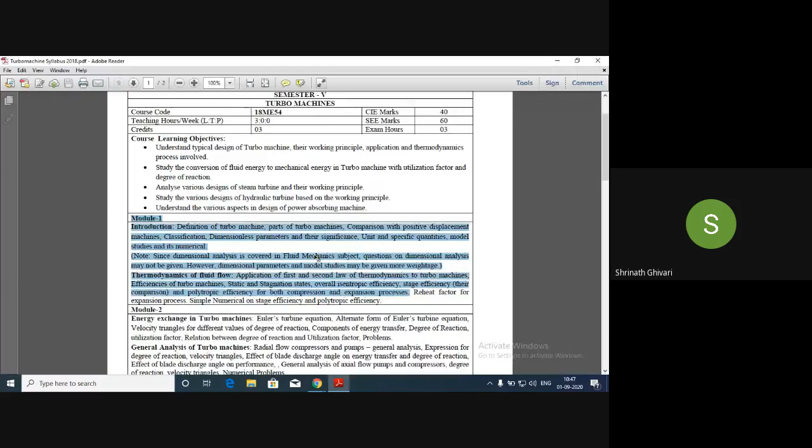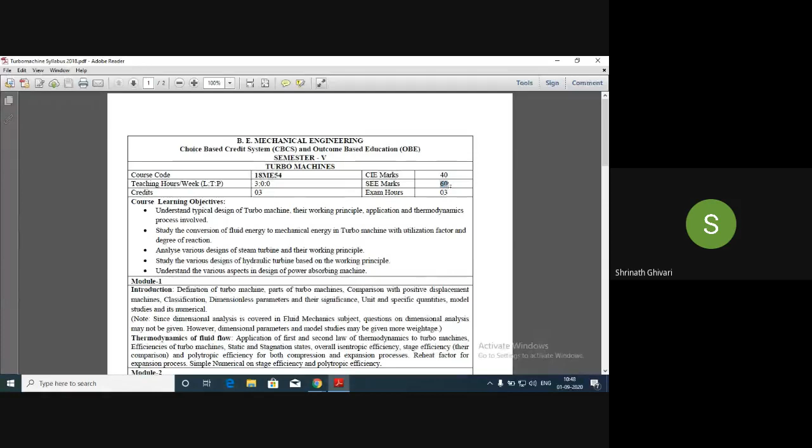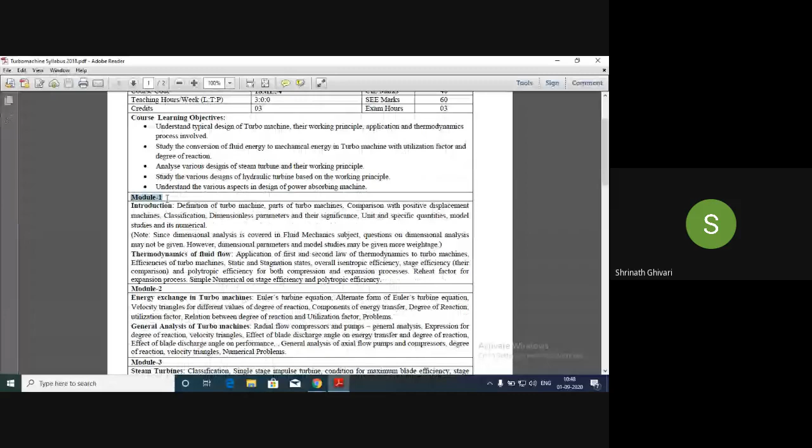The subject name is turbo machine, and the subject code is 18ME54. And internal marks, we have 40 marks. You have to write 3 internals. Semester end examination marks is 60, and examination will be 3 hours. These are the course learning objectives. Please go through them. Then we'll be initially starting with module 1. For today's class, I will just brief about the syllabus, what we have in module 1 to 5.

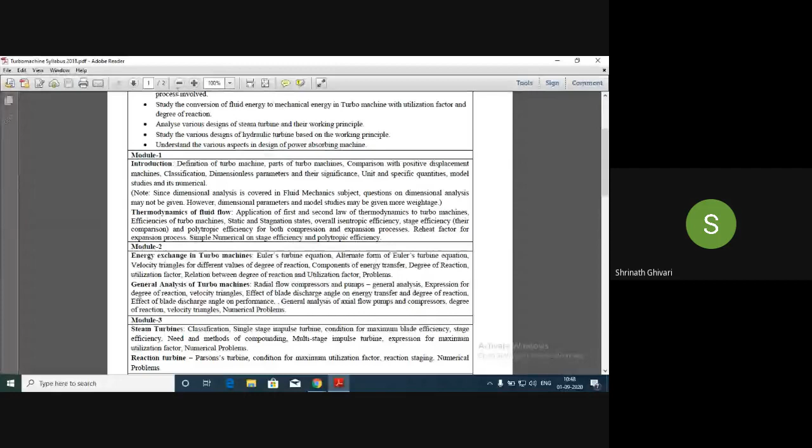So in module 1, I was telling that we will be learning and understanding the turbo machine, its definition and its parts, general parts of a turbo machine. Then we have positive displacement machine. We will just understand what is a positive displacement machine, and we will differentiate between a positive displacement machine and a turbo machine.

Okay, so then we will be studying...

Then we will be studying about some dimensionless parameters like Reynolds number, and we'll understand the significance of Reynolds number. Then we will be studying some important quantities like unit and specific quantities, which are helpful in predicting the performance of a machine, especially a turbo machine.

Then we will be studying about model and model studies. Model studies is, I think you have learned it in the previous semester, which is model and prototype, similitude study, where we'll be going through the kinematic, geometric, and dynamic similarities.

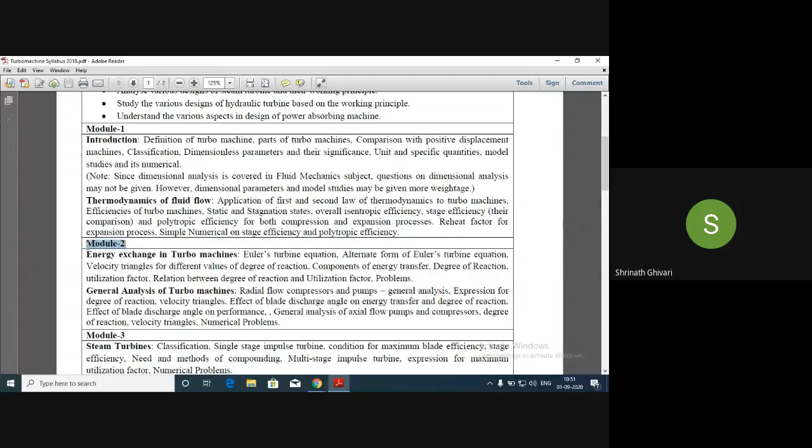Then in module 2, this is very important. Module 2 is about velocity triangles, which is a slightly difficult part, but at the same time, if you understand it, it is very easy. So in module 2, initially we will understand the three-dimensional application of velocity triangle to a turbo machine, how the velocity triangle can be drawn, and what is the use of the velocity triangles. All these things we'll understand in this unit.

With the help of velocity triangles, we can find out work done and many other performance parameters of a turbo machine. So this is another method other than the conventional method. In applied thermodynamics, I think you have found out efficiency of an engine, efficiency of a gas turbine, and work done. So here also we can find out efficiency and work done with the help of the turbo machine or this velocity triangle concept. So we'll understand how to find out the work done, efficiency, and other performance parameters of a turbo machine.

First, in module 2, we'll be learning about energy exchange in turbo machines. Initially, we'll be going with Euler's turbine equation. Then we will be continuing with the alternate form of Euler's turbine equation.

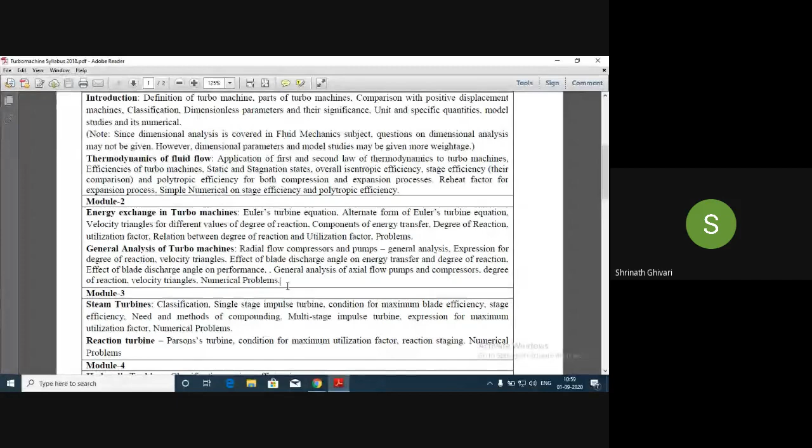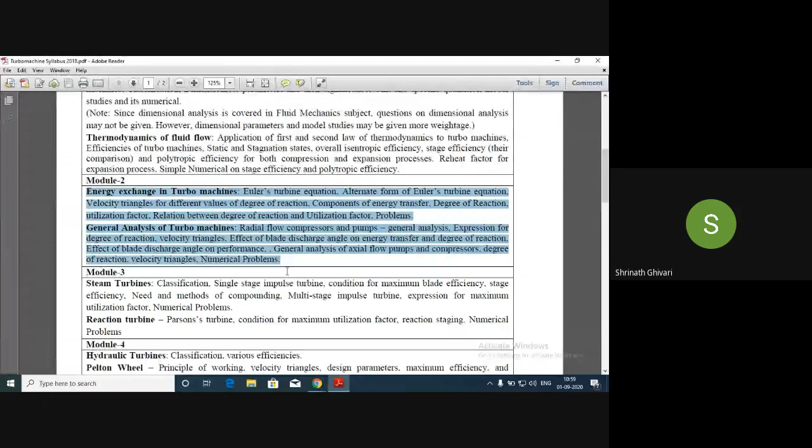Once we understand the general analysis part, then we can use the same concept of the velocity triangle to the actual application part. We can use it to analyze a steam turbine, and we can use it to analyze hydraulic turbine, as well as you already have learned this in your previous semester, that is Pelton wheel, Francis turbine, Kaplan turbine. Then we'll be studying in module 5 centrifugal pumps and centrifugal compressors.

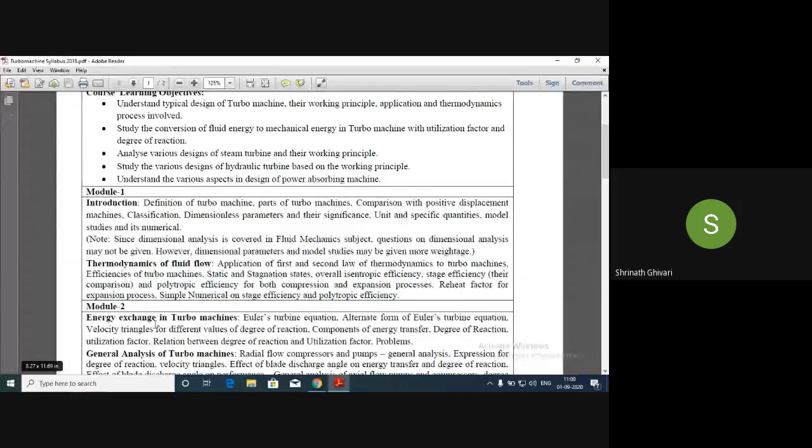Now I was talking about power absorbing turbo machine, power generating turbo machine. Now what is a power generating turbo machine? We should have an idea of that power generating turbo machine.

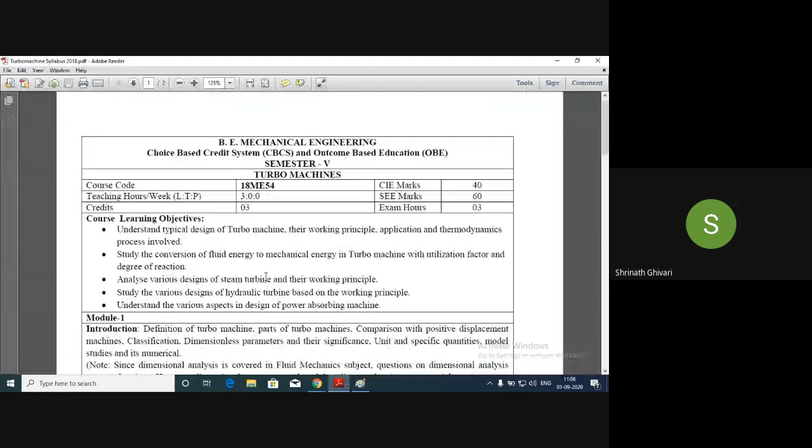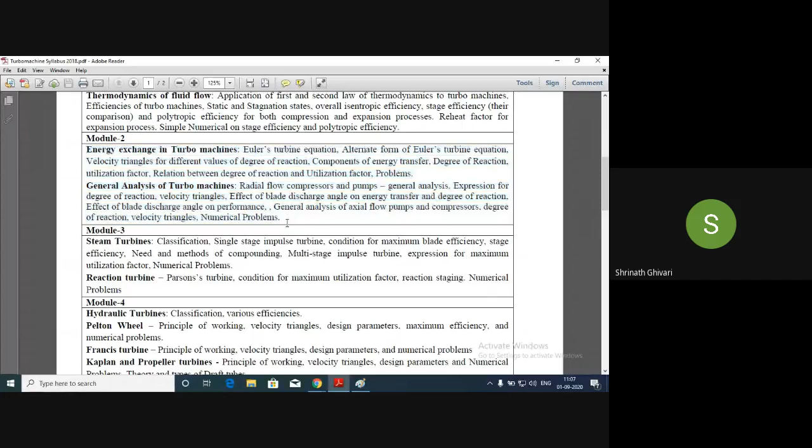If you see the syllabus, in module 2 you will be generally analyzing a turbo machine, and after understanding this general analysis, we will apply it to steam turbine. Now, steam turbine is a power generating turbo machine. In steam turbine we have reaction turbine, so we'll study reaction turbine also. I think about steam turbine, you already studied in EME part that in steam turbine we have impulse turbine.

We have reaction turbine. So we'll be studying some parts of steam turbine, impulse turbine and reaction turbine. And in first year, in your EME syllabus, you have learned about compounding also, correct? So we'll be studying about compounding in this subject.

Need and methods of compounding. I think you have learned about compounding: we have velocity compounding, we have pressure compounding, we have pressure velocity compounding. So all these things. And in steam turbine, we have two types, impulse and reaction turbine.

Again, in impulse and reaction, we have classification that we will see later. Then again, in steam turbine, we will be defining certain parameters, nothing but utilization factor, and we'll be doing a small derivation. You can see here, expression for maximum utilization factor, and we'll be solving certain numericals on this. Also we'll be doing a derivation for condition for maximum blade efficiency, and also stage efficiency.

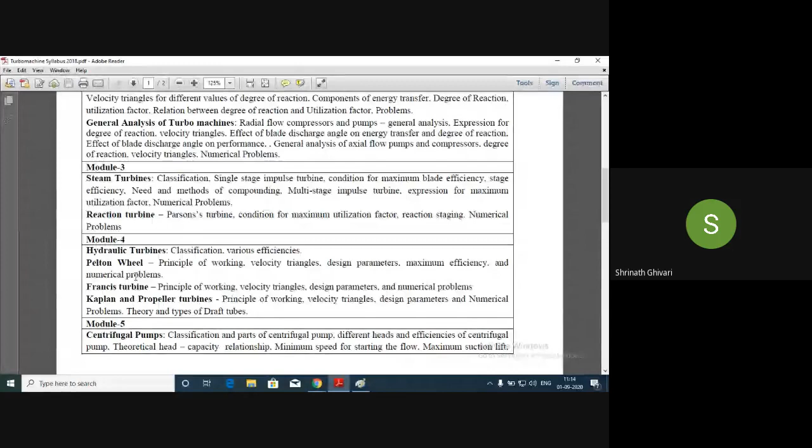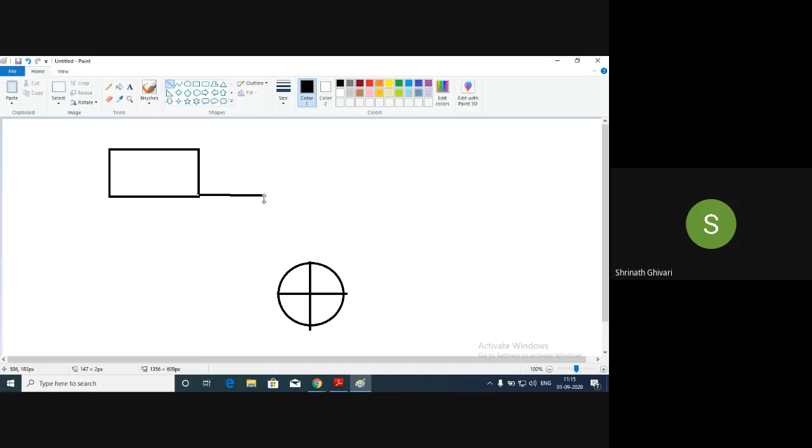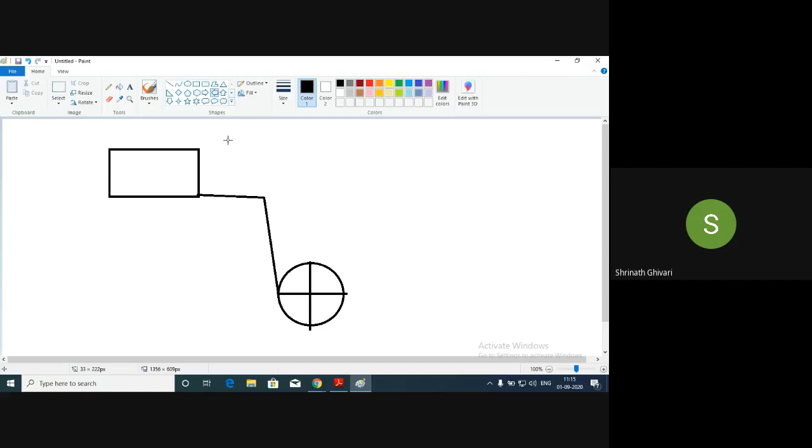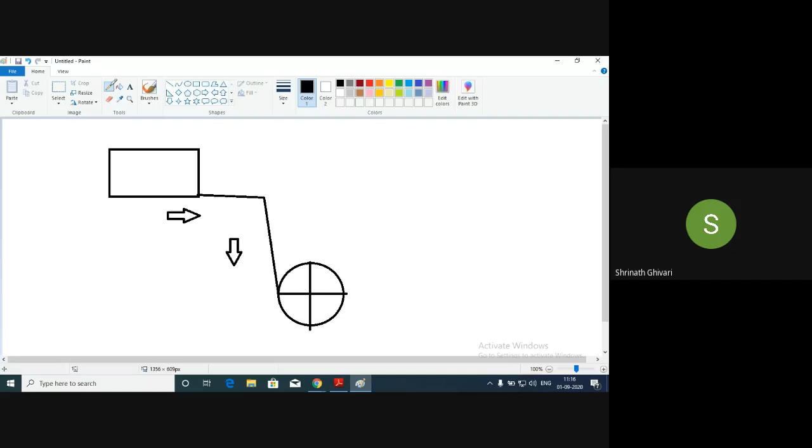Just let me show you on paint so you get a fair idea. Let's assume that this is your turbine, or wheel. So we have a water source here. What we will do is make this water follow this path, correct? If you see this pointer, water will start from here, where we have the water source. It may be naturally available, or it has been created artificially by constructing a dam or some other source. So this is the water source, correct? Water will start from here, come down, strike the wheel blade, and the wheel starts rotating. So this is how the conversion of potential energy generally takes place.

So we have water available at some height, we call it PE, potential energy, correct? Once the water starts moving, we see the conversion of potential energy into kinetic energy, correct? Then when it hits the blade, the wheel starts rotating at a certain RPM, so we call that rotational energy or mechanical energy. This mechanical energy is converted into electricity with the help of generators, different types of generators - synchronous generators will be used to convert this. So this is how conversion of energy takes place in hydraulic turbine.

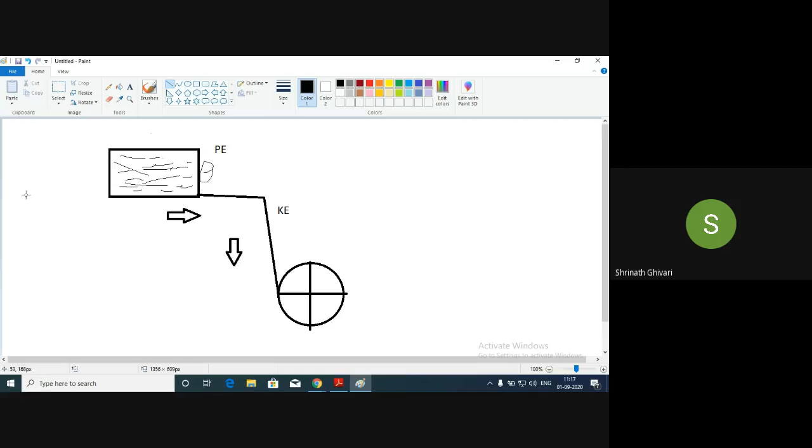Now, if I mark from this point to this point, where the water is striking the blade, so this point you can take exactly - let me highlight that point.

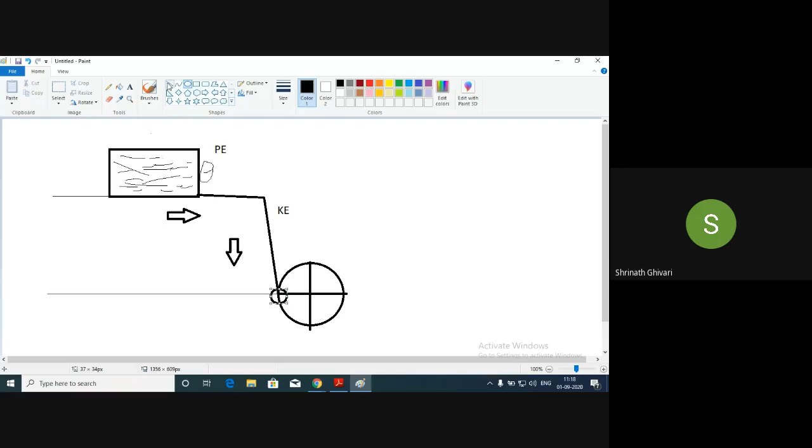Okay, so exactly we can take this point, sorry. So I am talking about this point where the water is striking the blade. So this point, the height between the two, this distance, we use the word head. So the head will define the amount of energy. Head will define the amount of energy.

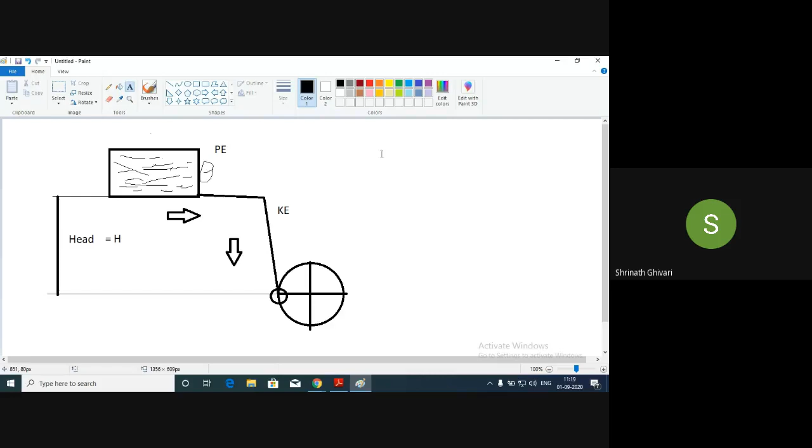For head we will use the symbol small h or capital H. Some authors use small h, some authors use capital H, but we will be using capital H for our convenience. So if the head available is more, automatically we will get more power generated. Okay, so I hope you know the equation. Power P is equal to rho QgH, correct? Or WQH, where W is equal to, sorry, W is equal to rho into g.

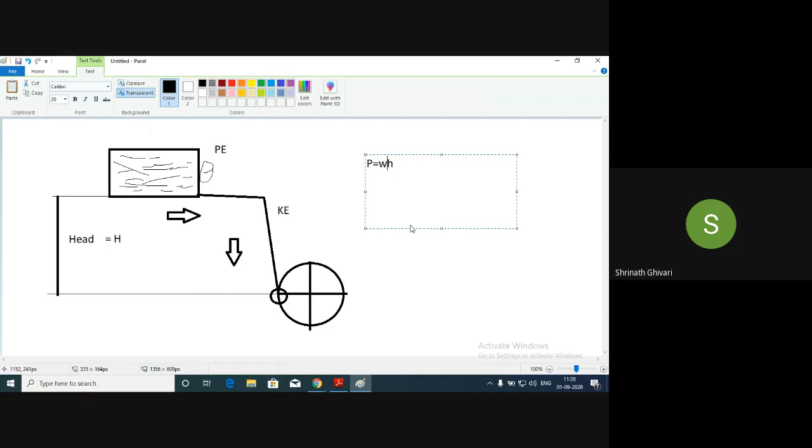Slightly increase the font. Okay.

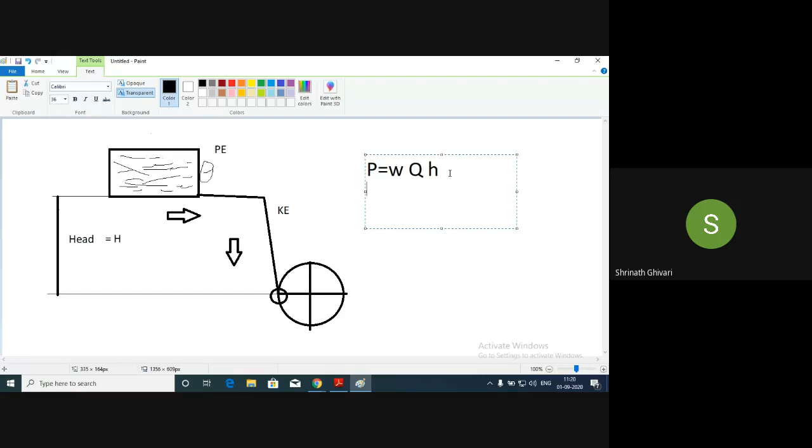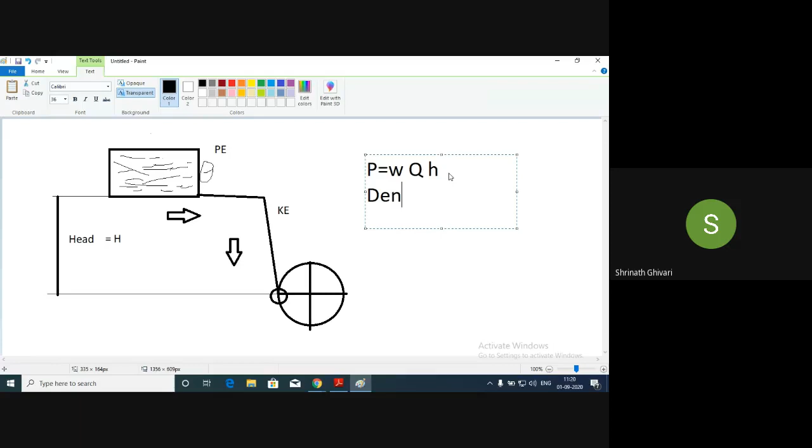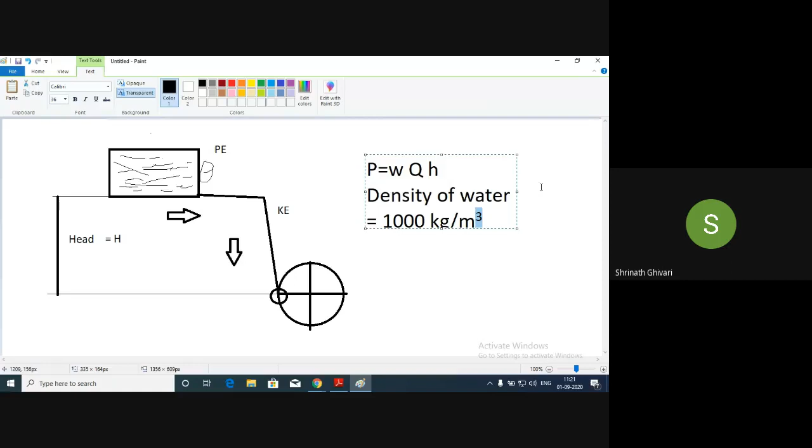So W is rho into g, correct? Rho is density of fluid. I hope everybody knows. What is the density of fluid? Here in hydraulic turbine we'll be using water. What is the density of water? Can anyone tell? 1000. Not one. It's 1000, no? 1000 kg per meter cube. That's great. It is 1000. So the density of water is 1000 kg per meter cube. Correct, no? Okay. So this is rho.

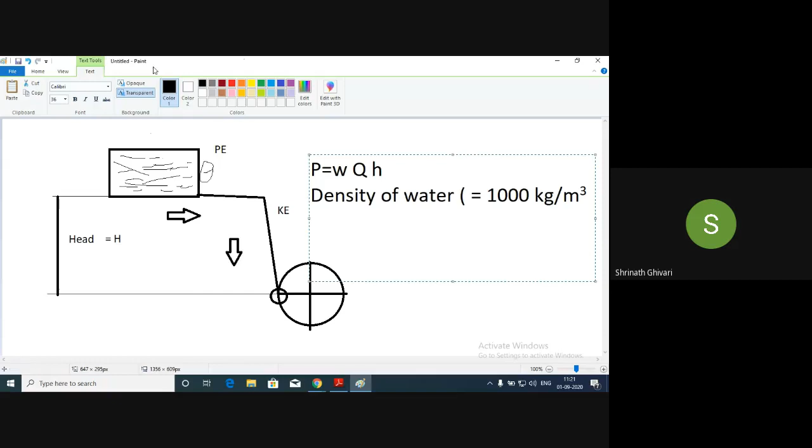I don't know how to write rho here. Please wait.

So this is the symbol rho. So actually W is rho into g. So the value of W is how much? You have used this in your previous semesters, no? What is the value of W, which is rho into g? Can anyone tell the value of W? What is the value of g?

Okay. So W is rho into g. So what we are doing is 1000 into 9.81, which comes out to be 9810. g is acceleration due to gravity, 9.81, and this 1000 is density of water. So it is 9810. And what is the unit? Newton per meter cube. Okay, correct. So this is the value of W. I think in fluid mechanics you have used this many times. You will be familiar with this.

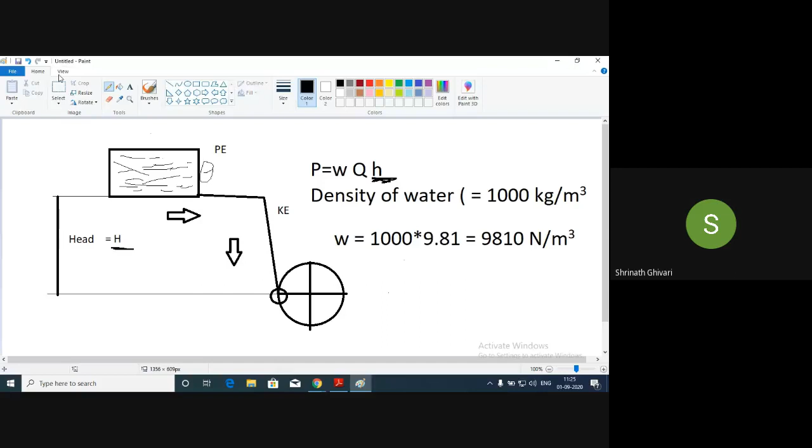I hope this part is clear. So next, we'll be studying these things. Along with this, we'll be learning about draft tube, and I think you'll be knowing this. Draft tube is used only for reaction turbines, not for impulse turbines. Again, in hydraulic turbines, Pelton wheel is an impulse turbine. Francis and Kaplan are reaction turbines.

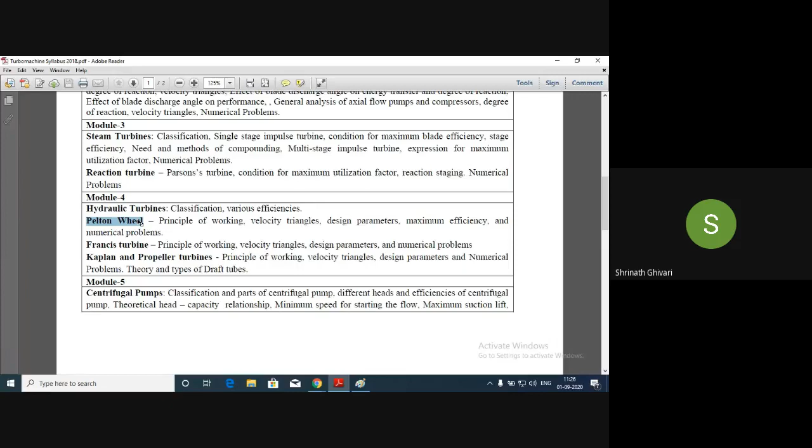And impulse turbine and reaction turbine, we will understand why we use the word impulse for a particular turbine, and reaction for some other types of turbines. We will understand that once we start the module. Then in module 5, we'll be dealing with centrifugal pumps, or we can say we'll understand power absorbing turbo machines. This is a very easy topic, and most students prefer to attempt this question in the main exam, and usually the problems and concepts in this are very easy.

So we have centrifugal pumps. I hope you can tell me examples of centrifugal pumps. Can somebody tell an example of a centrifugal pump? Or in day-to-day life, where do you use this pump? Let it be any pump, centrifugal, axial, or reciprocating, any type of pump. Please tell me where you have seen this, or where we'll be using this. We use it in day-to-day life. Any examples for pumps?

If you are commenting, motor. No, any particular type of pump. Grinder pump. Okay. Multi-stage pump. Okay. Any particular multi-stage pump? Yes. Any particular example you want to give where you see it in day-to-day life? Application. You have seen, no? General water supply. Okay.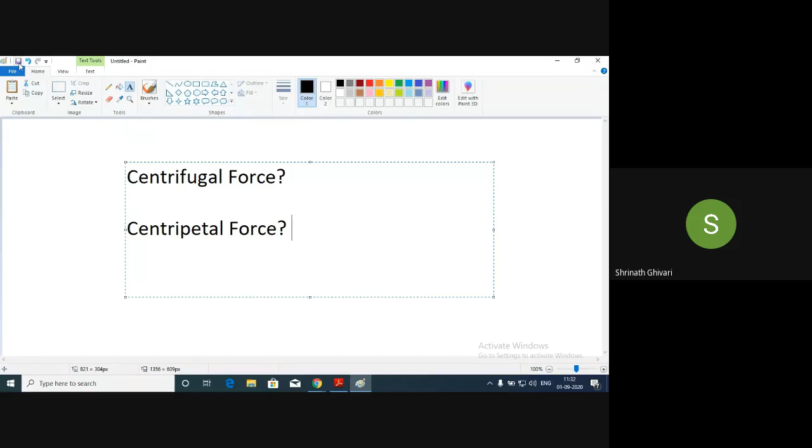Assume that this is a wheel which is rotating. Is that clear? It may be clockwise or anti-clockwise. This is a wheel and it is rotating. Maybe this is its center point. Let us suppose it is rotating in this direction. So this is rotating in anti-clockwise direction.

Now, when a certain part of the machine or a certain component or a particular wheel is rotating, we have two forces. One force is centrifugal force, another force is centripetal force. When something is rotating, we have these two forces, centripetal and centrifugal. This comes into picture only when the parts are rotating.

So as you told, centrifugal is which is moving away from the center. Centripetal is which is moving towards the center. So this is basically centripetal and centrifugal force. We have both forces involved.

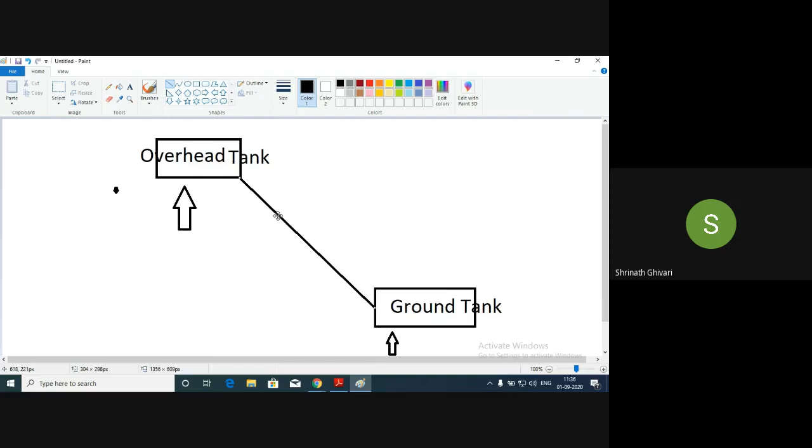Now, in case of centrifugal pumps, what will you be doing? You will pump the water from here to here. Correct? Yes. In case of pump, we will be pumping the water from ground level to the overhead tank using motor and pump. So this arrangement is for pumps.

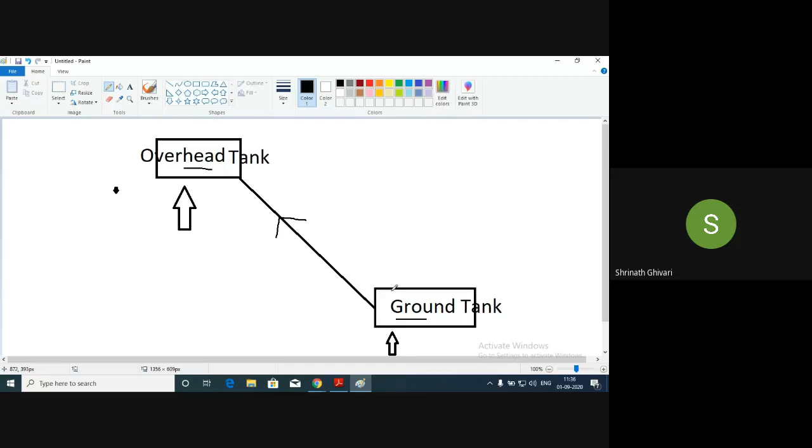Now, if you reverse it, assume that this overhead tank is your water source, like Jog Falls. We have a certain arrangement where the water will come down in this direction, and it is going to hit the wheel. We will get electricity.

So here the point is simple. Pump and hydraulic turbines are exactly opposite of each other. If you have a water source, you can use it like a turbine. If you want to pump the water from ground level to top level, you will be using a pump. So if you understand hydraulic turbines, understanding centrifugal pump is very easy. You need to reverse everything with small modifications. Even if you modify the velocity triangle of a hydraulic turbine, you will get the velocity triangle for centrifugal pump.

I hope the basic understanding of this explanation is clear. Pump and hydraulic turbines are exactly opposite to each other, with slight modifications. Then we have centrifugal compressor. I hope everybody understands what a compressor is.

I think everybody has filled air in a two-wheeler or four-wheeler tire at petrol bunks. That is nothing but a compressor. The normal pressure of air is 1 bar. You will be compressing it to a higher pressure, then filling it in the tire, maybe tube tire or tubeless tire. There we use compressors. But how do compressors work? Again, we use a motor and a mechanism to compress the air so that its pressure increases. For this case also we have velocity triangles.

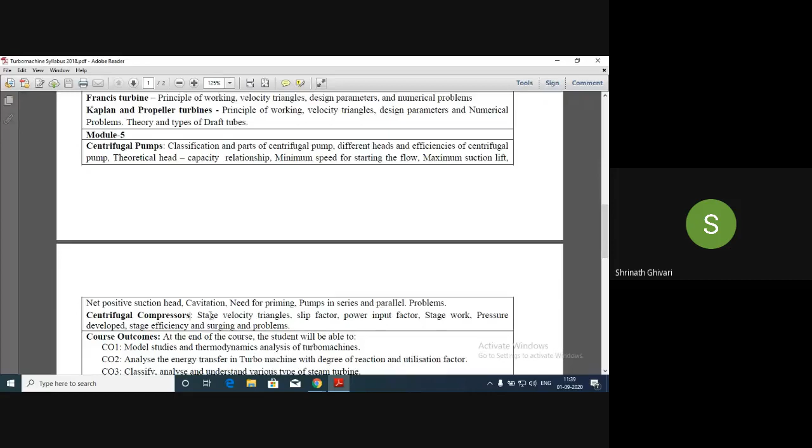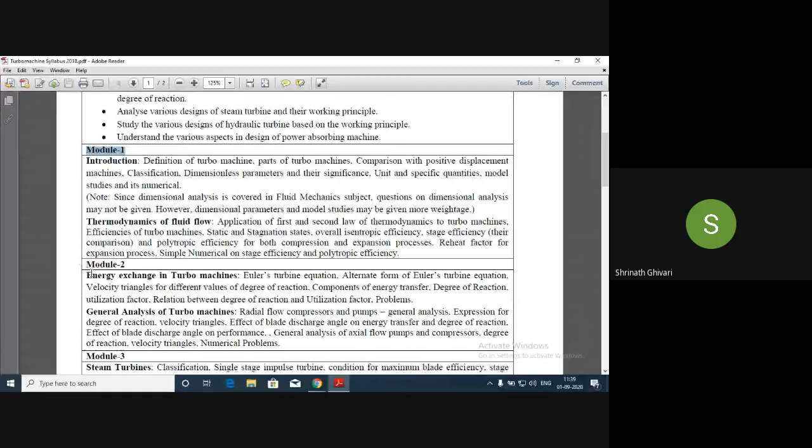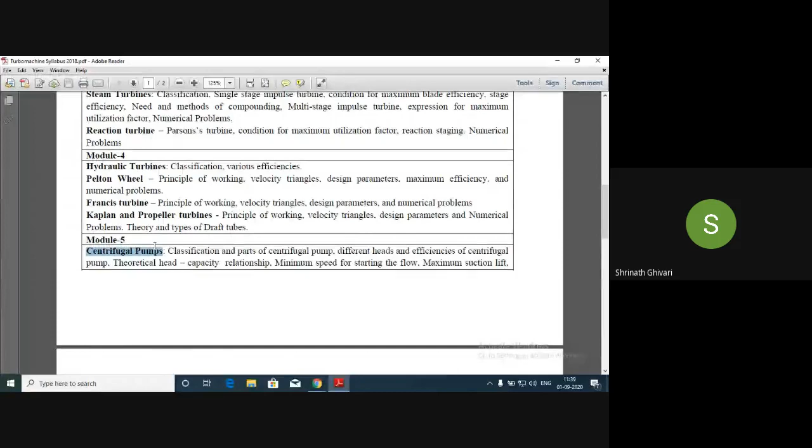So this is just a brief about the syllabus, what we will be learning. Initially we will learn the introduction part of a turbo machine. We will define what a turbo machine is. Then we will go through the general analysis part in module 2. Module 3 and Module 4 are power generating turbo machines, and Module 5 is power absorbing turbo machines.

Not PdV. From the boiler pressure, you used to find out enthalpy, H. Then from condenser pressure, you used to find out another enthalpy. So you used to call them H1, H2. Then you used to find out work done, H1 minus H2, something like that. Are you able to recall? So that is how we calculated work done in ATD, applied thermodynamics. But here we will be finding out work done in a different way, where we will be using velocity of water, velocity of steam.

Sachin, I think you are having problem with voice. Please check from your end once. There may be connection issue or something.

Okay. So in this subject we will be using velocity of water or velocity of air. The main term is velocity, where with the help of velocities we'll be finding out work done and efficiency. Is that clear? It is same thing what you have done earlier, but here in a different approach. So first we have to understand that approach, then it becomes very easy. From module 2 onwards, we have the concept of velocity triangle introduced. That is very important. Prior to that, we need to understand the introduction part, what is a turbo machine and other things. For today's class, this much is sufficient. From tomorrow onwards, we will start with the definition of turbo machine, take some examples and proceed.